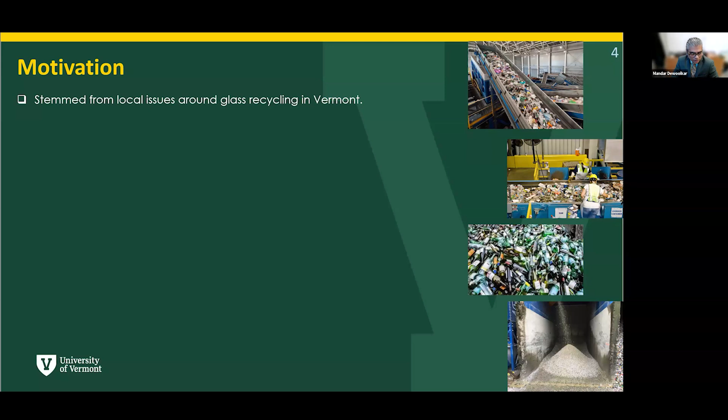With that, I'm going to hand it over to Nick, who is going to orient us on why this project, how it took shape. Thank you, Mandar. I'll just read all of those things. There you go. Thank you.

So sort of where this started for the Agency of Transportation: we were approached by one of our glass recyclers when their outlet for processed glass cullet stopped accepting the material. This glass cullet in particular was appealing from an engineering perspective initially, just because it's processed to a particle size similar to that of a coarse sand, as opposed to other glass cullet that might typically be a 3/8 minus or a 1-inch minus. This material is processed to a very small particle size.

This was brought to our recycled materials working group, which is a collaboration between the Vermont Agency of Transportation, the Vermont Agency of Natural Resources, as well as our industry partners and recyclers. Within that group, we work together to find beneficial reuse for recycled materials and manufacturing byproducts.

A little history: the Vermont Agency of Transportation standard specifications for construction has allowed for the use of up to 10% PGA blended into sub-base material since at least as far back as our 1995 edition. But to our knowledge, no contractors have really been using that option. We also reviewed the standard specification published by AASHTO, designated M318, titled Glass Cullet Use for Soil Aggregate Base Course. That standard provides guidance for using up to 20% PGA blends for road-based materials.

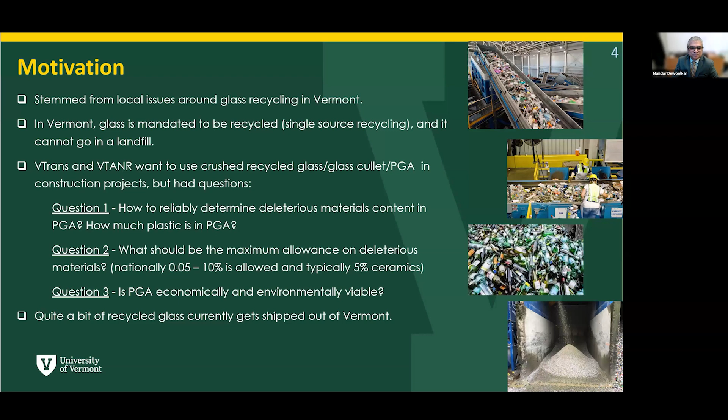This study is funded by the Transportation Infrastructure Durability Center and was also supported by CSWD, one of the local recycling facilities, Agency of Transportation, Agency of Natural Resources, and so on. Our goal was to develop reliable and operationally simple methods to determine the deleterious material content in glass cullet, or crushed recycled glass, which we'll call PGA throughout the presentation. Once we started working on the project, there was quite a bit of interest in figuring out how much plastic was in PGA specifically.

So we focused on coming up with methods that were simple. In the literature, you find evidence that blends or actual PGAs acquired from recycling facilities had acceptable geotechnical properties, but there was no systematic study that actually examined the effects of a particular percentage of deleterious material and what would be an allowable deleterious material content. So we worked on that.

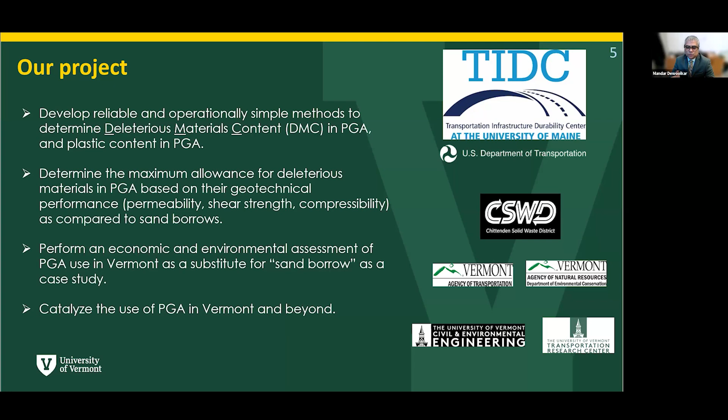For Vermont, we wanted to study the economic assessment of using crushed glass instead of sand borrow, the material used as a free-draining material, typically granular material with less than 5% fines. Finally, hopefully this project will lead to more widespread use of PGA in Vermont and beyond.

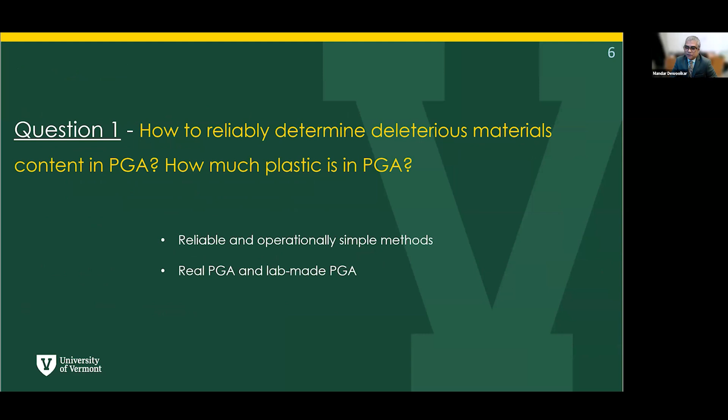So the first question is how to reliably determine deleterious materials content in PGA, and also plastic in PGA. Our focus was on reliable and operationally simple methods. For that, we used PGA acquired from recycling facilities, as well as PGA we made ourselves in the lab, where we knew exactly how much deleterious material was in it.

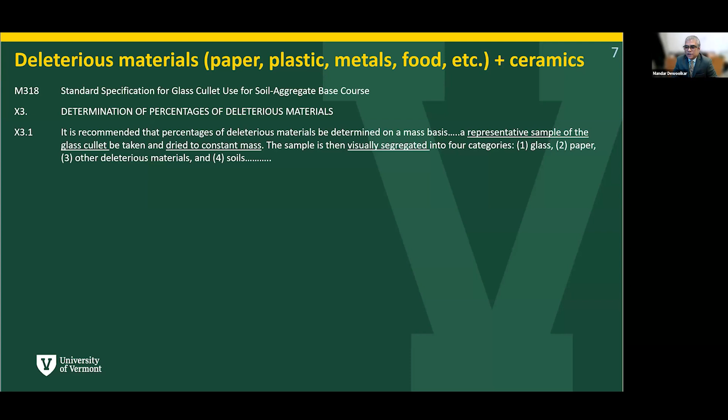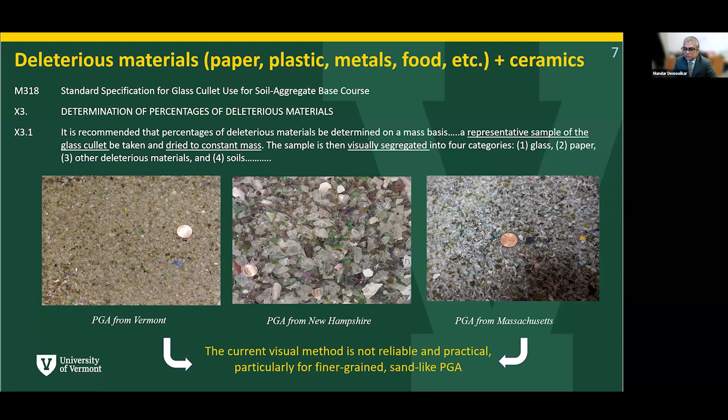Here are three different materials that we obtained from recycling facilities in Vermont, New Hampshire, and Massachusetts. You can see a US penny added to the picture to get an idea of the size. Particularly the one on the left and the one on the right, it's difficult to visually separate all the deleterious materials and ceramics to figure out the deleterious material content in a given PGA that one acquires.

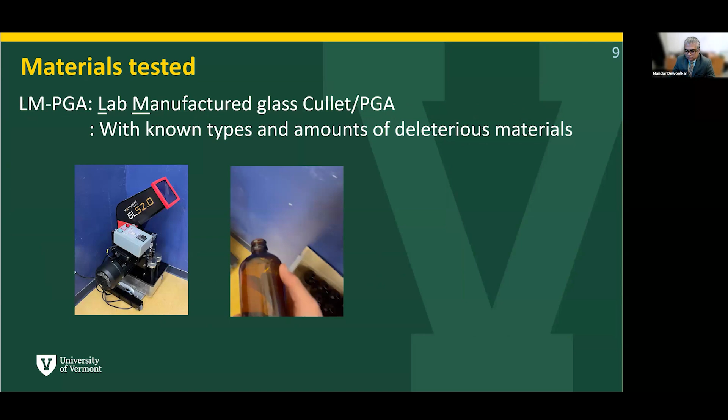But one problem with real materials is that you don't know exactly how much deleterious material content is in it. So for that, we acquired this machine and clean glass, and prepared our own PGA, which we refer to as LMPGA—LM stands for lab manufactured. The previous one we called RFPGA, where RF stands for recycling facility PGA.

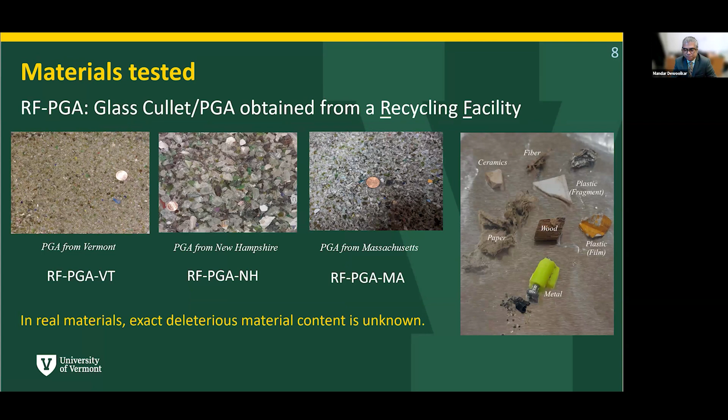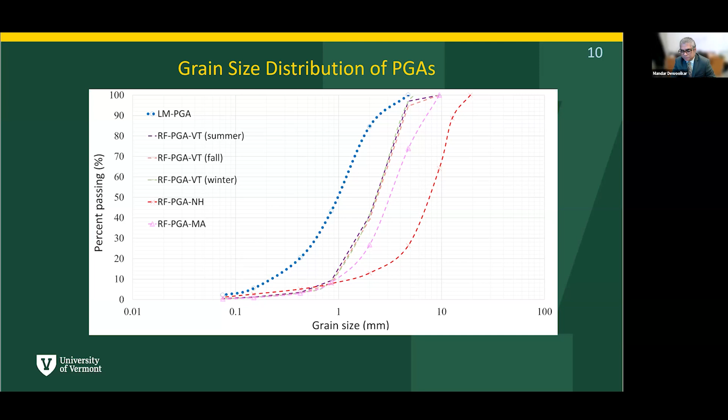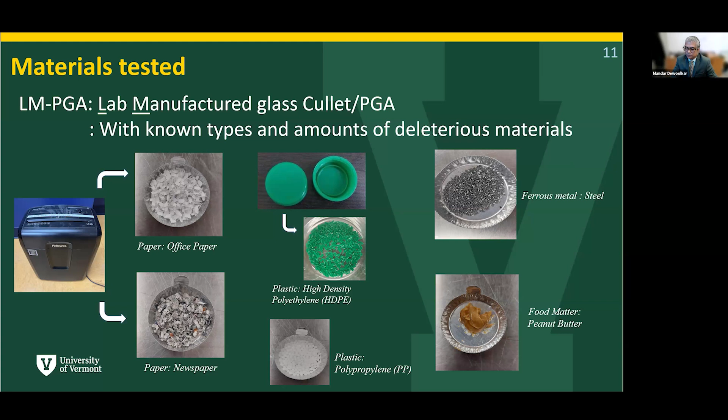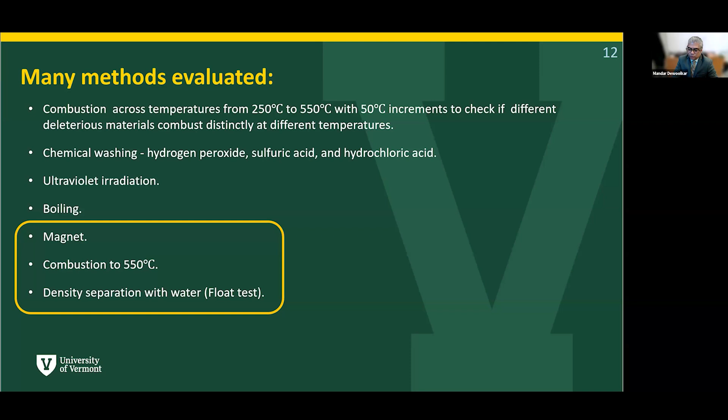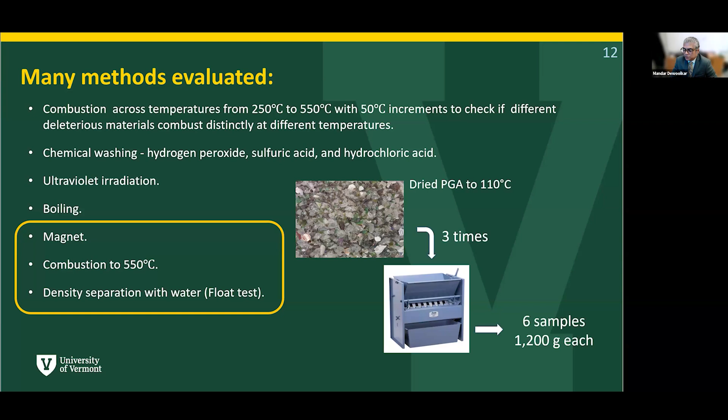We acquired 6 samples of 1200 grams each to run tests on them. The first protocol we developed is a combination of a magnet test and then combustion. This 1200 grams of sample would be spread thin on aluminum sheets, and then a magnet passed over it several times until no more material was picked up.

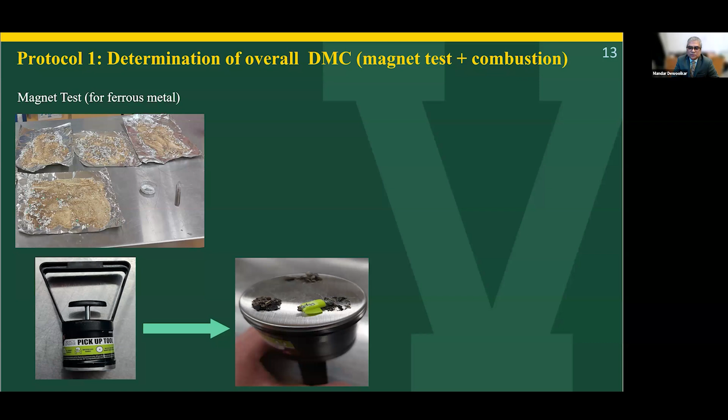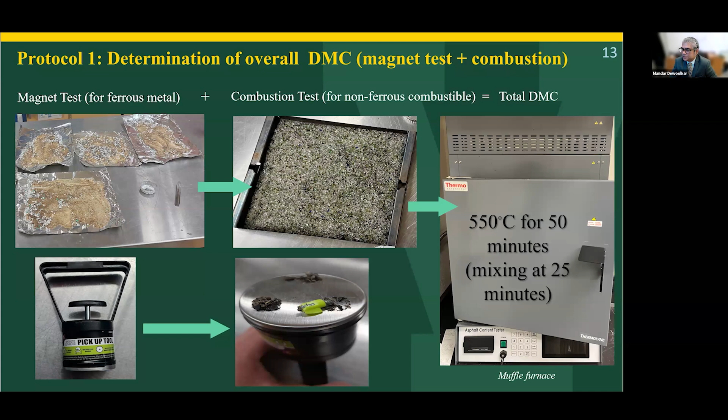That would separate all the ferrous materials. The remaining material would then go into the muffle furnace at 550 degrees for 50 minutes, mixing it once after 25 minutes.

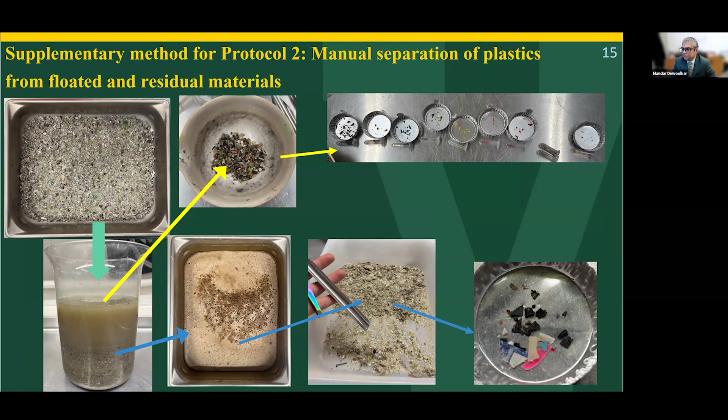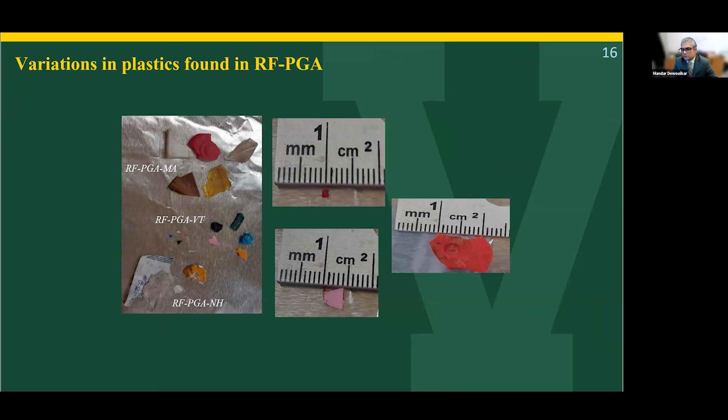Different types of plastics and their sizes are seen here. They range from really small microplastic-type sizes to several pieces over a centimeter in size, in different colors.

Whatever she took out that looked like plastic or ceramic, we used a technique called FTIR. Each individual piece was put under this machine to figure out what type of plastic it is, and whether it is plastic or not.

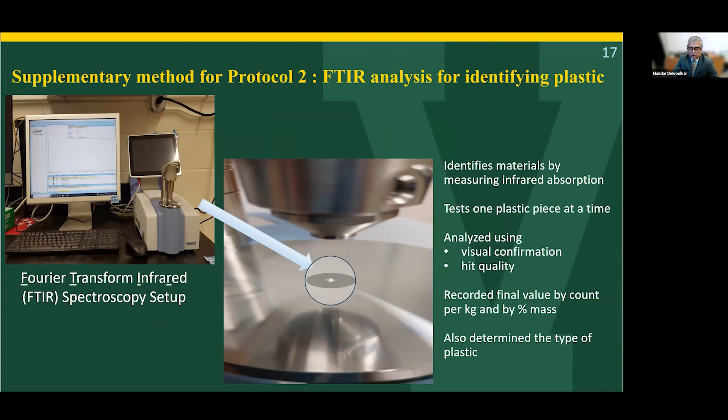I'll quickly go over some results.

This one is on a lab-created material. We started with clean glass and added 2% deleterious material: 2 different types of plastics, 2 different types of paper, and 0.4% peanut butter. Here are typical results.

We tested 6 samples, 1200 grams each. The pink highlight is protocol 1, the magnet test followed by combustion to 550 degrees. No ferrous metal was added, but we still picked up a small percentage, 0.02%, of ferrous material out of the glass, which we think are impurities in the glass. When we put it at 550 degrees, about 1.9% of the material burnt, whereas the total expected was 2%, because everything we added was supposed to be combustible.

But when paper burns, it actually leaves some ash behind. So we measured about 1.9% instead of 2%, which is still a pretty good result. Across the 6 samples, the variability was quite small.

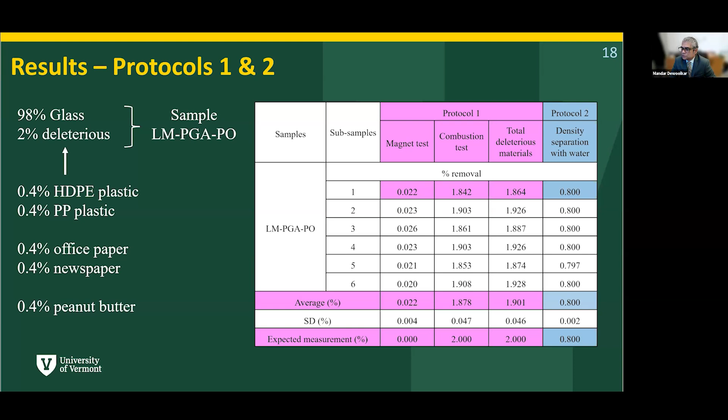All the way to the right, in blue highlight, is the density separation method, where we added the material and separated what floated. We expected 0.8% to float, which was all plastic, and we recovered almost all of it in this case.

The second material, we tested many materials but just picked a few to share. Again, 98% clean glass and 2% deleterious material, but this time, instead of peanut butter, we had steel shavings. We added 0.4% steel and recovered through the magnet test a little over 0.4%.

After doing the combustion test, again the total material we were able to determine as deleterious material content was 1.9%, as opposed to the 2% that we added.

Protocol 2, density separation in water, once again recovered all the plastic that we added. One thing to notice: these tests were done on this material by 3 different operators, because we wanted the test to be not only simple to administer, but also largely operator independent, without requiring a lot of experience and skill.

In this particular case, all 3 operators got very consistent results, which was good news. Each one of them tested 6 subsamples.

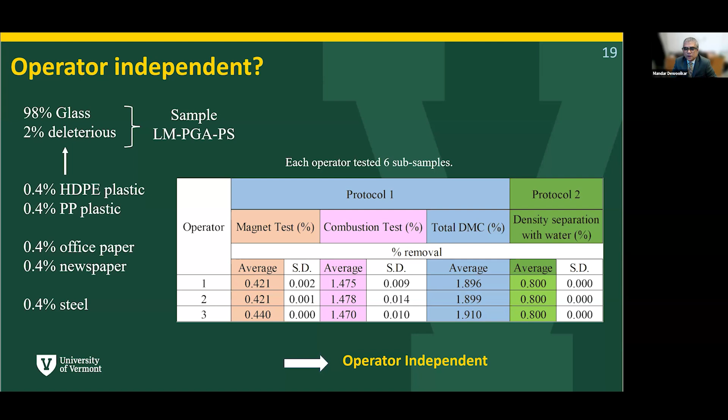Then we moved on to the materials we acquired from 3 different states' recycling facilities. Here we see that the total deleterious material we were able to determine changed from about 0.5% to 3%, and the total material floated after the float test was between 0.1 and 0.8%.

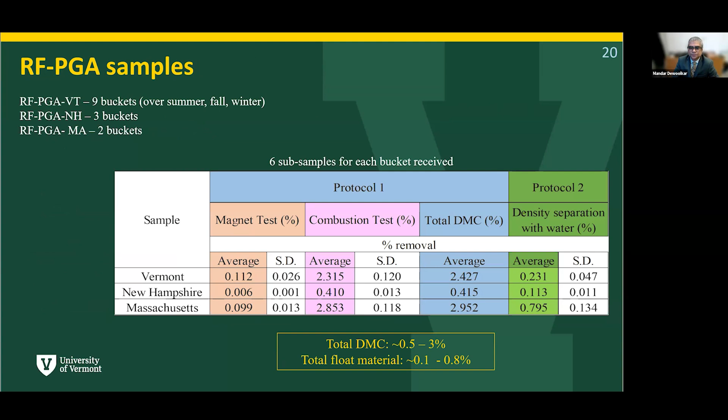Recall that all testing was performed on 6 subsamples of 1200 grams each, which we felt could be considered quite a bit of work. So we wanted to evaluate if we could reduce the number of subsamples. We did statistical analysis comparing all 6 subsamples versus any 4 versus any 3, and determined that even with only 3 subsamples, the error was less than 2%. So our statistical analysis showed we could do 3 subsamples instead of 6.

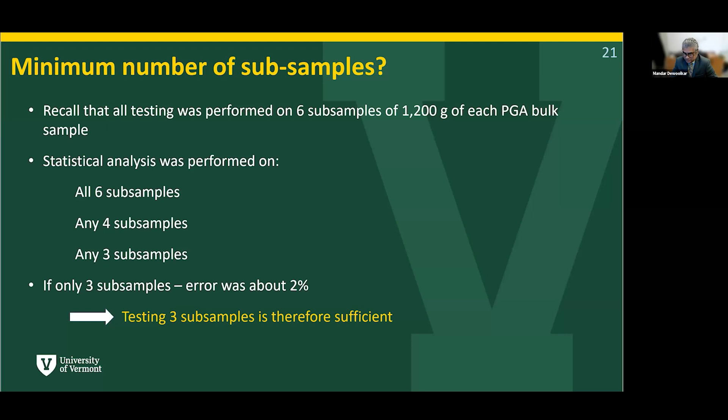We don't want to recommend 1. I think 3 is a good number.

But in general, it appears that, at least for the materials we tested, it is reasonably conservative to assume that everything that floated was plastic. But if someone was really interested, they could do FTIR analysis to figure out what percentage of material was plastic. But it takes a lot of time.

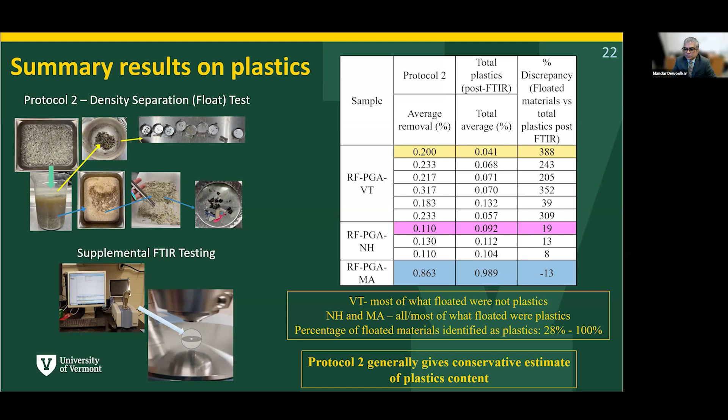So in relation to question 1, we were able to show that protocol 1, which we developed with magnet plus combustion test, can be used routinely for assessments of deleterious material content in PGA. It does have the limitation that it cannot capture the ceramics percentage and non-ferrous materials. However, based on our discussions with recycling facilities, the percentage of non-ferrous metals is supposed to be really small.

Our lab tests, or geotechnical testing that we did with up to 20% ceramics added to clean glass, showed that geotechnical properties of glass don't change a whole lot with even up to 20% ceramics. So not being able to determine ceramics appears to be not a big deal.

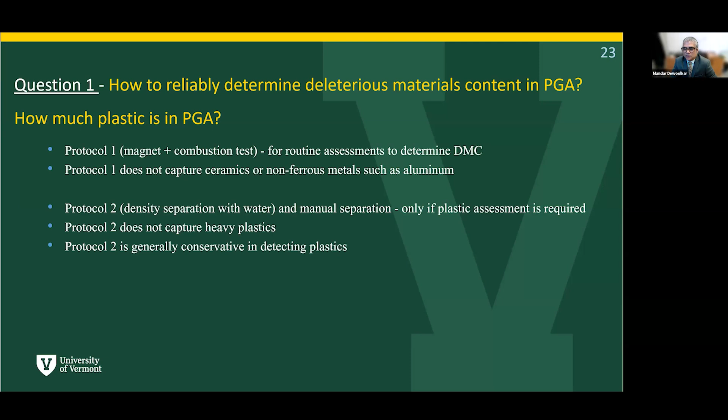Protocol 2 works well to determine plastic, but at this point we are not recommending it because of its time-consuming nature, unless stakeholders are specifically interested in figuring out the plastic content in the glass. Both protocols are reliable and operator independent, and we were able to show that. For protocol 1, 3 samples were sufficient.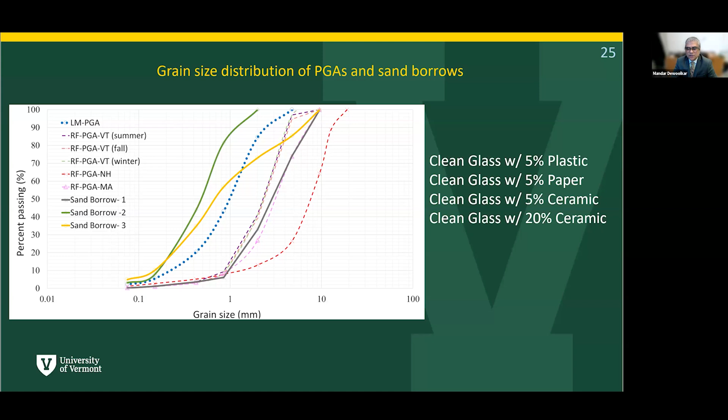We also added different known amounts of deleterious material, like 5% plastic, 5% paper, 5% ceramic, and 20% ceramic. Nick was interested in knowing the impact of each one of these materials if we were to allow 3% or 5% deleterious material content, what if all of it was paper? So that's why we did this study. We also have data on 3% plastic and so on.

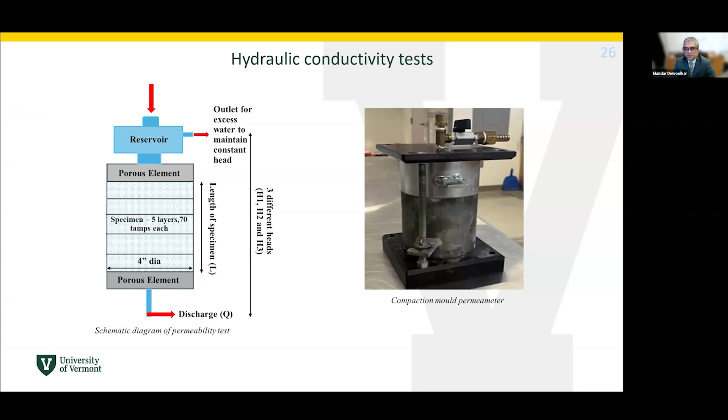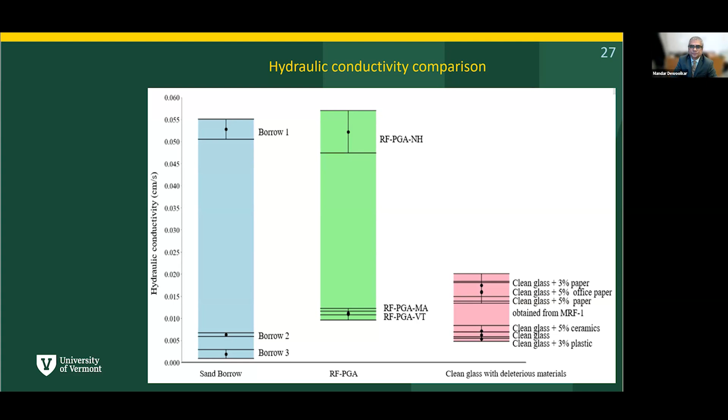These results show that all the materials we tested had hydraulic conductivity higher than the lowest of the borrow material hydraulic conductivity. We did a direct shear test, drained direct shear test under saturated conditions, under 3 different normal stresses: 25, 50, and 100 kPa. We developed this new apparatus, which allows 8 inch by 8 inch by 3 inch high specimens. Given the grain sizes of these different materials, we decided to use a larger direct shear apparatus.

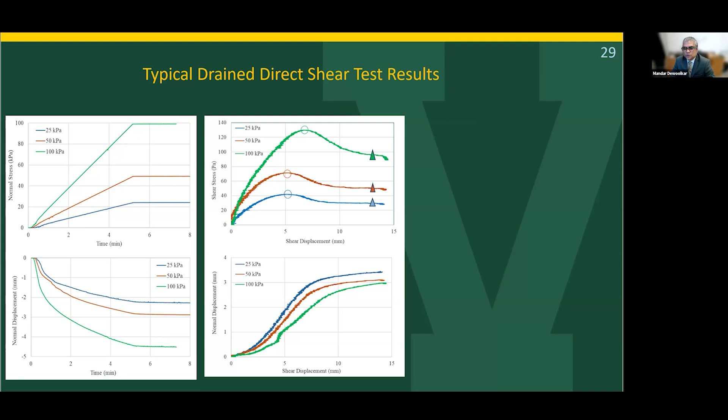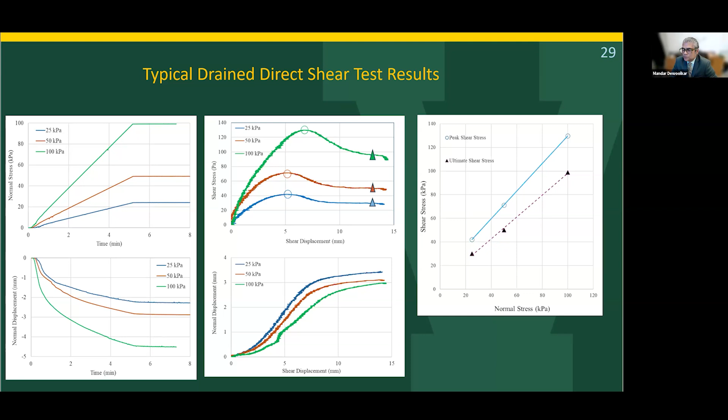Then the shear stress versus shear displacement plot, we took the peak values and ultimate values. We were able to create Mohr-Coulomb failure envelopes using those for either peak or ultimate shear stress values. Here is aggregated data. The 3 solid lines of peak shear stress versus normal stress plot are for the 3 sand borrow materials, and the other 3 dashed lines are for the 3 recycling facilities PGA.

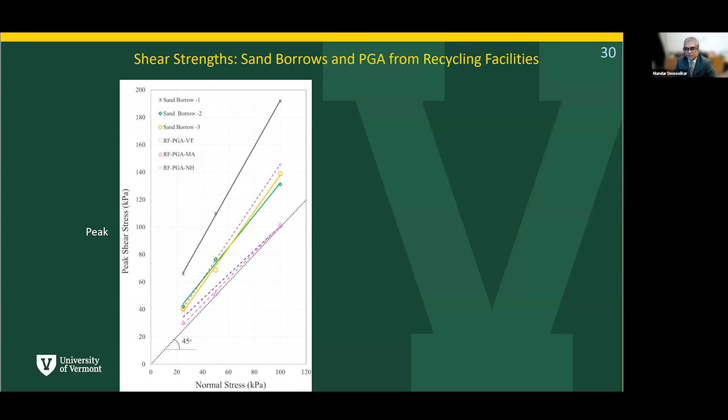There is some variation—2 of the PGAs gave slightly lower failure stresses, but overall the peak friction angle was always higher than 45 degrees in this case, which seems to be a high enough number for any design. If we look at ultimate numbers, the lowest was about 40 degrees as shown in this plot.

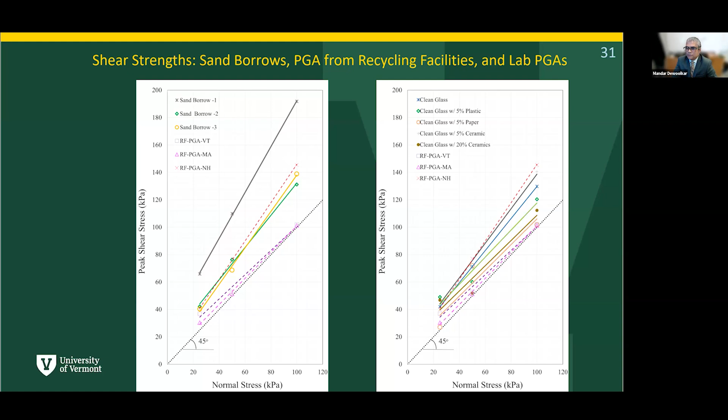So the figure on the left is the same as what we saw on the earlier slide with sand borrows versus recycling facilities PGA. But the one on the right, instead of sand borrow materials, now we have clean glass with paper, clean glass with plastic, and clean glass with ceramics, at 5% and 20%. Again, all of those fell above 45 degrees Mohr-Coulomb internal friction angle, showing that the geotechnical properties seem to be acceptable even if you had 5% paper added to the glass.

For compressibility, again, all the data from sand borrows and recycling facilities clustered together. We had a slightly higher settlement when we had 5% paper added. As one can imagine, 5% paper is a lot of paper, but considering it was that much paper, the results are fairly reasonable.

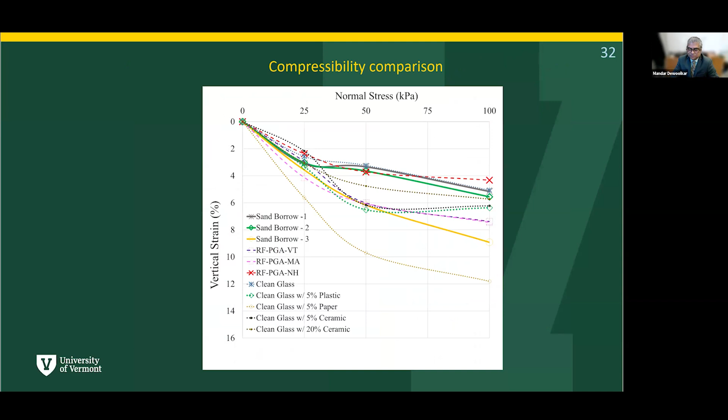So what we learned from this research question is that the geotechnical properties of PGAs are comparable to those of borrow soils, and it seems like even up to 5% deleterious material content can be allowable. We also were able to show that up to 20% ceramic added did not have much impact on the geotechnical properties of PGA in an adverse way.

So with that, I'm going to turn it over to Matt about the next research question. Matt, can you share this? Yeah, I think let's play from the current slide. All right, so let's see if I can minimize this. I will stop sharing and you can. Yep, no, I think we're good. Okay, good. Yep, all right.

So I want to briefly talk about the economic analyses and the initial environmental life cycle assessment that we considered, specifically related to greenhouse gas emissions. Again, we focused on case studies in Vermont, and I'll share results from looking at the 2 largest materials recovery facilities in Vermont.

So just briefly, where recycled glass in Vermont goes. In the year we were looking at, 2022, there were 21,000 tons of glass that were recycled. This doesn't include any glass that ended up in the landfill. Of that, about 7,300 tons is part of the bottle bill glass, meaning this is glass that people take to drop-off centers to get their nickels back. But 13,600 tons is ultimately sent to materials recovery facilities.

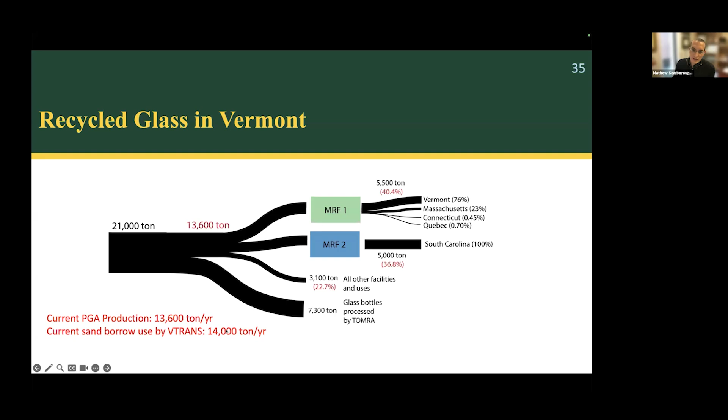So we first wanted to look at the economics using—I'm just going to focus on MRF1. Oh, and sorry, just to mention, if you're wondering, this 13,600 tons per year of processed glass aggregate—VTrans alone used 14,000 tons in the study year. So conveniently, these numbers are quite close.

But if we look at the economics, this facility, MRF1, processing 5,490 tons a year, the tipping income—the amount they charge associated with the glass—is $520,000 a year. Of this, there's $455,000 in processing fees, and associated with the current end use of PGA and shipping it to multiple locations, it's something they pay for, which is about $250,000 a year.

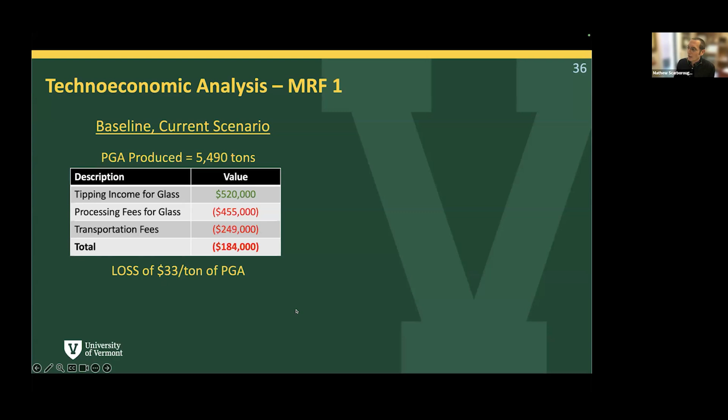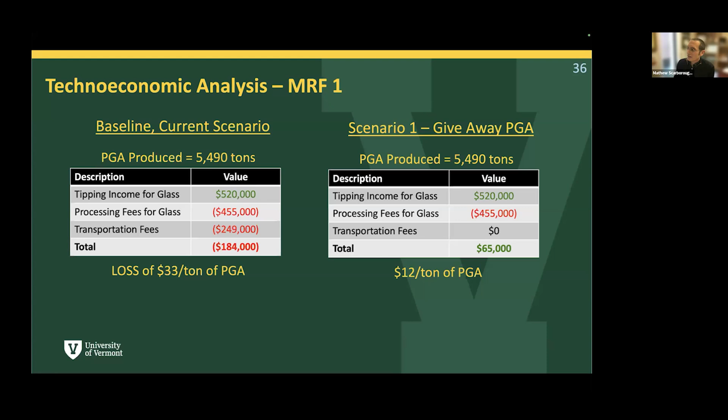So currently we estimate they're losing about $33 per ton of PGA, and they're aware, and we know generally that PGA is a cost for these facilities. The one scenario we considered was just giving away the PGA—processing it, keeping it on site, letting contractors or suppliers come and pick it up. Essentially, the transportation fees would just go away, and if you do that, there's actually some income associated with the PGA of about $12 per ton.

We also looked at facilities, imagining one that doesn't have any infrastructure to produce PGA, and considered what it would look like if you had to purchase this equipment brand new. This equipment and associated equipment works out to about $2.3 million for a facility this size. Operations and maintenance end up at about $16,000 per year, and looking at this over 20 years with a discount factor of 5%, the minimum selling price for glass would be $11 per ton.

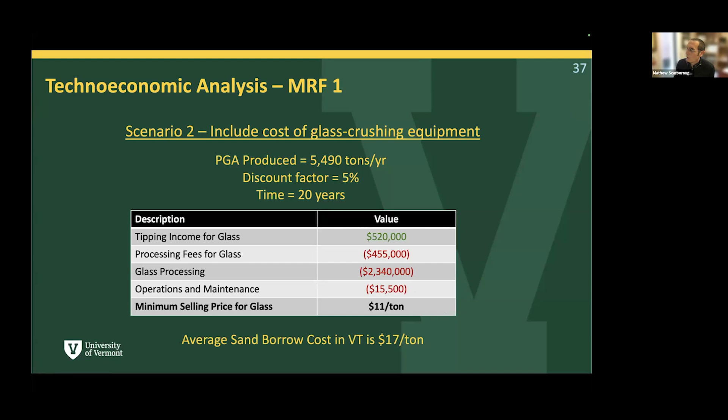To give an idea, the average sand borrow cost in Vermont in 2022 was about $17 per ton, so raw material cost should still work out to be within the range of what we expect for sand borrow. All right, to wrap up, we also looked at CO2 emissions.

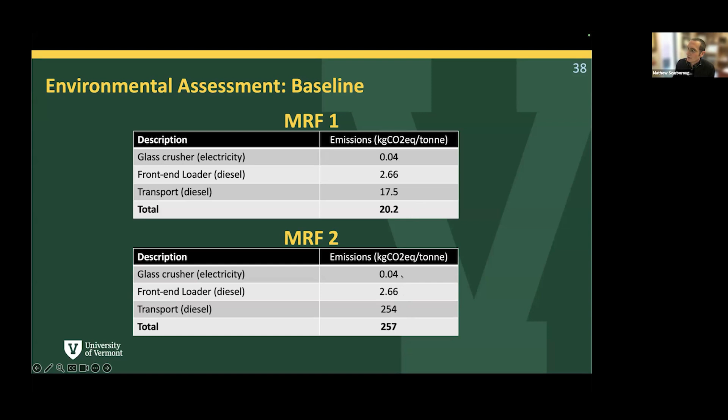Again, based on the current transport of PGA, transport is the greatest contributor to CO2 emissions. If you look at MRF2, which is shipping the PGA even further away, there are significant emissions associated with this transport. In these scenarios, transport really drives the CO2 emissions. There's also some emissions associated with operating equipment, as well as running the crusher.

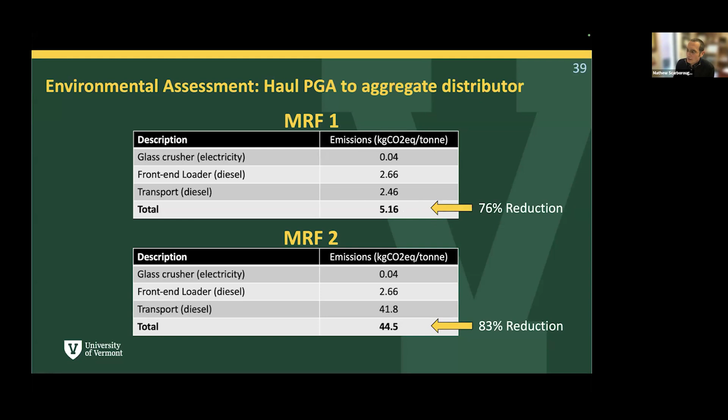So when we look at hauling the PGA to a current aggregate distributor—a sand pit—we essentially reduce emissions by 76% for MRF1 and 83% for MRF2. So there are significant CO2 savings when we think about local use of PGA rather than shipping it out of state.

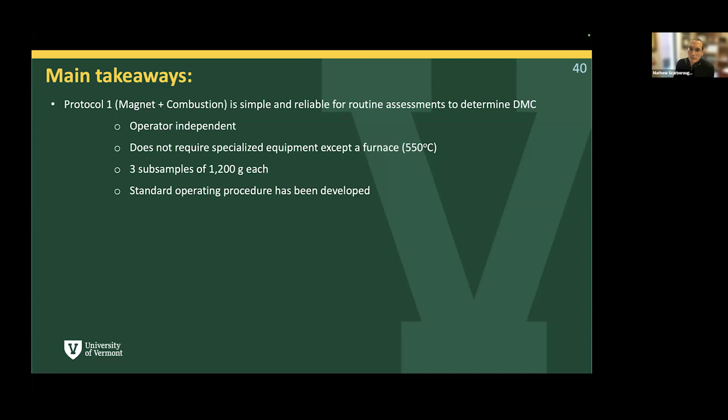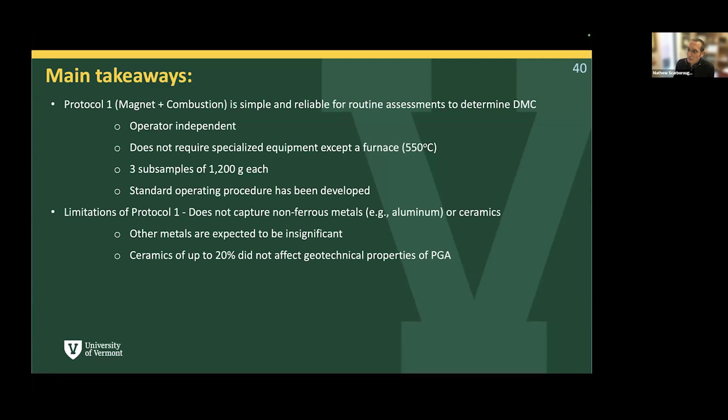All right, so to wrap up the entire presentation, like Mandar was saying, Protocol 1 is simple and reliable for routine assessments to determine deleterious material content. There are some limitations in that it will not capture non-ferrous metals or ceramics, but non-ferrous metals are expected to be insignificant in terms of mass, and ceramics up to 20% did not affect geotechnical properties.

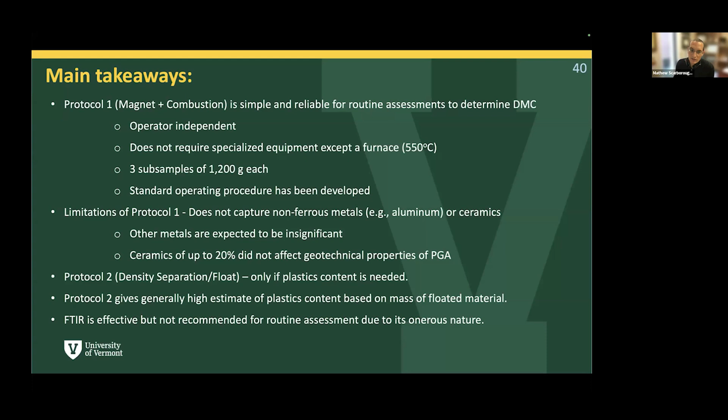Protocol 2, this density separation or float test, is recommended only if plastic content needs to be determined. It gives a generally high estimate of plastic content, but if you want a more accurate count of plastics, an FTIR can be used, but it is onerous.

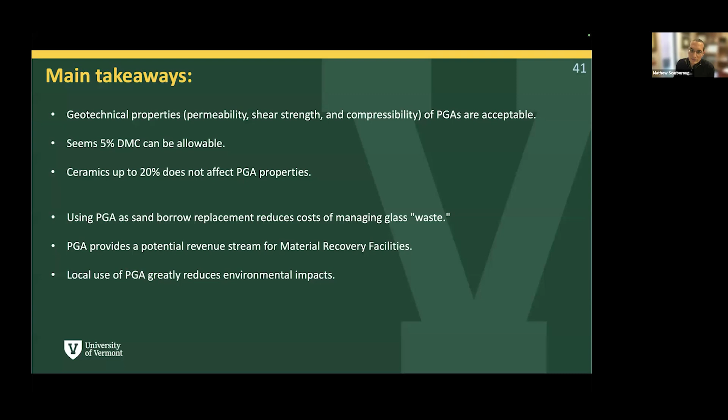Also, geotechnical properties of PGA are acceptable, and it seems that 5% deleterious material content can be allowable. Finally, using PGA as a sand borrow replacement reduces the cost of managing glass, provides a potential revenue stream for MRFs, and the local use of PGA greatly reduces environmental impacts. So with that, I'd just like to thank you all for joining us today.